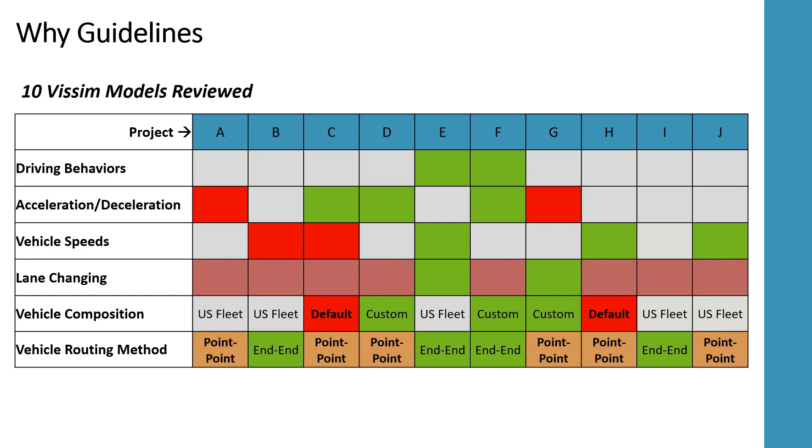All right, so the next slide: this project focused on Vissim, but it also looked at TransModeler. We reviewed 5 TransModeler models as well. Most of them were left with the defaults for a lot of the key behavior parameters that we've been looking at, and we just identified that. So for completeness, we want to share with this group that we did look at TransModeler as well as Vissim, and the guidance document addresses both softwares, which are the 2 that are used here in Kentucky.

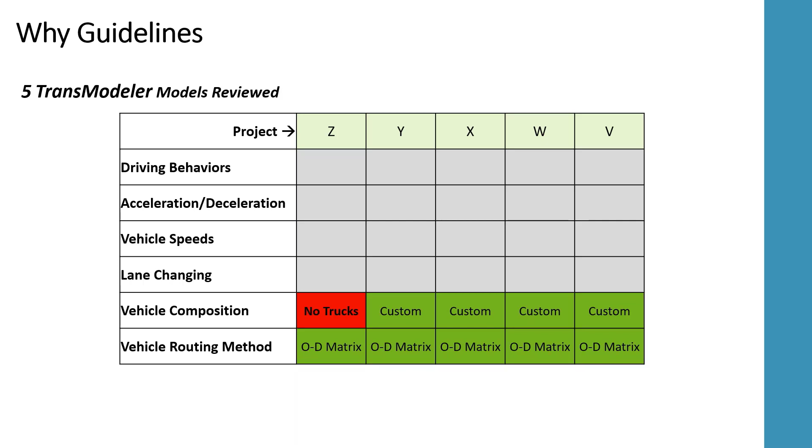So that's where much of the rest of this presentation is going to focus, but the guidance document that we are developing addresses all of these topics and provides folks doing simulation work in Kentucky with that information. It also helps those at the Transportation Cabinet who are scoping projects and deciding how to move forward with projects. So analysis tool selection, for example, is part of this process.

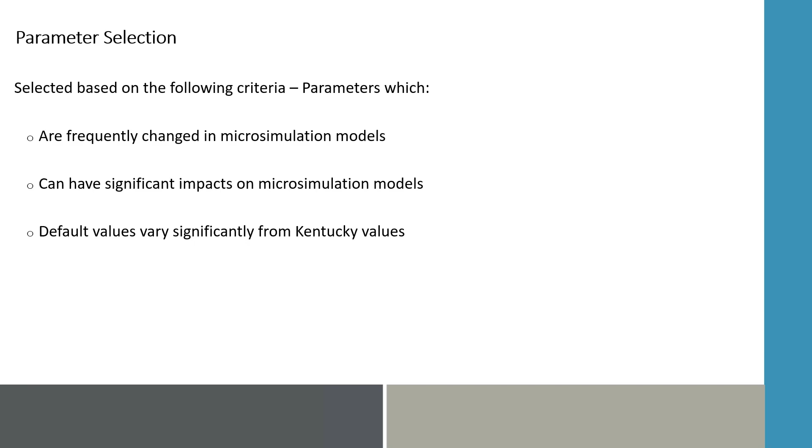So kind of like I was mentioning before, we selected some parameters based on three main criteria. So things that we noticed just from modeling ourselves or reviewing models, or the other guidance documents: parameters that were commonly changed in models, parameters that have significant impacts, and then parameters that we thought the defaults in the software might be significantly different from what Kentucky would be. So those are just kind of and/or criteria. So multiples fall into multiple categories, but that was the general framework for how we selected the parameters.

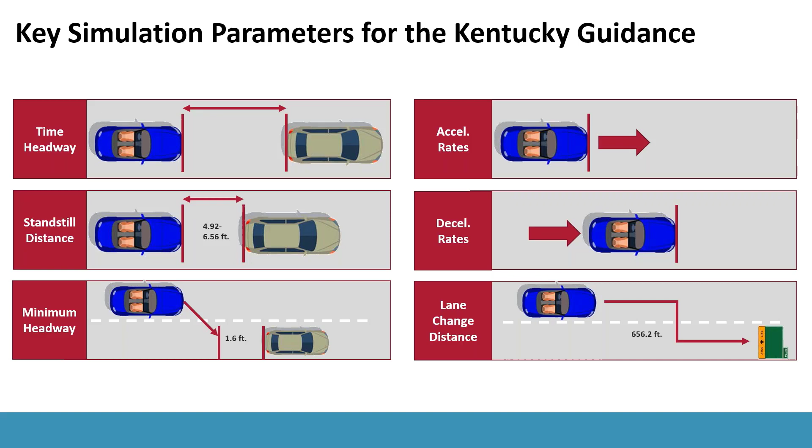And there were 9 that we were really looking at, and of those 9, 6 are really vehicle interaction based, so like actual driving performance and vehicle interaction in the model. So we graphically tried to depict it on the screen here. So time headway, standstill distance, minimum headway, acceleration, deceleration, and then lane change distance. Those are kind of the 6 that you would be able to physically observe, and then the additional 3 to make the full 9

are listed here, but those 3 at the bottom, 7, 8, and 9, are the vehicle speed ranges, so kind of speed decisions, and vehicle fleet composition, and then truck weight to power ratio. Those 3 are more background or fleet associated stuff that you don't really observe between vehicles in the model, but certainly affect the overall outcome of a model. So that's a full list there on the screen.

Many of you are probably familiar with these attributes, how they might affect a model. Maybe you've changed them, maybe you've observed them being changed. So they're commonly referenced in other guidance documents, and people provide values or ranges that they would suggest you use. And for this project, we wanted to make sure that it was, I guess, as local and real world as we could. So our real goal was to use real local Kentucky data to generate or validate the existing values or ranges for each of these parameters.

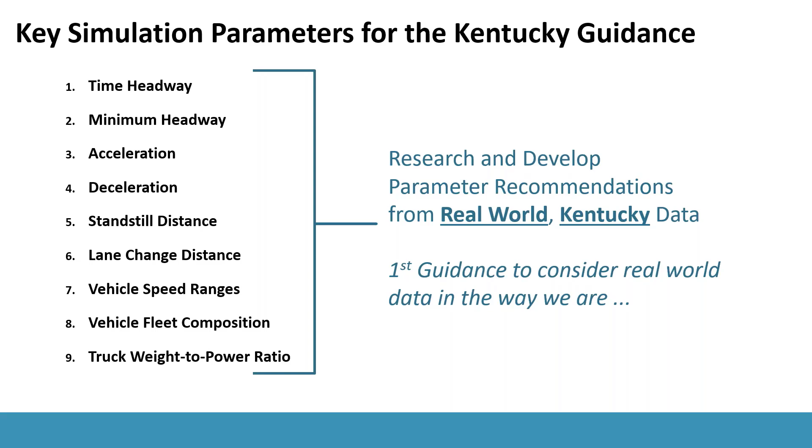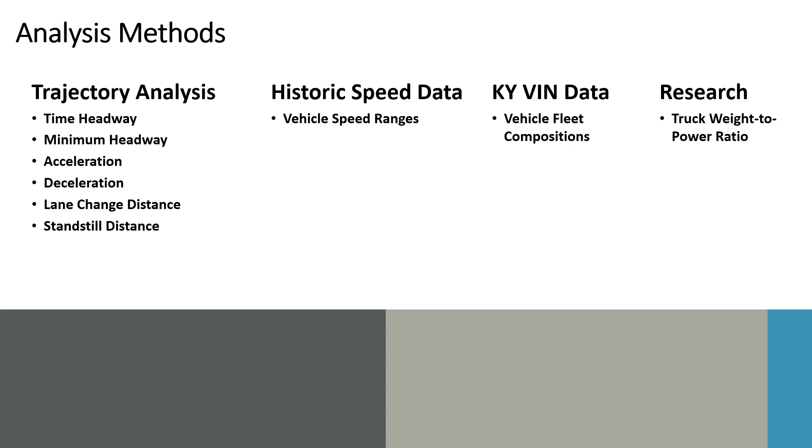So to do that, we were going about it with a few different analysis methods. The main one and the focus for a lot of this topic is the trajectory analysis. So you can see there, we were able to look at those main 6 using trajectory data, and then the remaining 3, we used different data sets for each: historic speed data provided by KYTC, historic HERE data on a variety of different roadways, VIN data, so vehicle registration data throughout the state, and then just literature research on studies about weight to power ratios. This one was the least Kentucky specific, but trucks are not different in Kentucky. So we thought that was more across the board normal.

So to do the trajectory analysis, this was new for me and seemingly new in general. We collected data using drones. So we collected video footage with drones in 8 different locations, both urban and rural, and on arterials and freeways throughout the state. So we tried to get a good mix of different types of driving. Not sure how familiar everyone is with Kentucky, but it has a variety of different environments. It has generally rolling terrain, it's a very traffic engineer thing to say, but urban and rural and suburban sections throughout the state.

And so we wanted to try to get a good mix to get a better handle on what's actually going on. And we did try to provide urban and rural recommendations where they make sense. But I guess the other piece to that is, to me, it was a question of what does trajectory data mean and how do you collect it and what do you do with it?

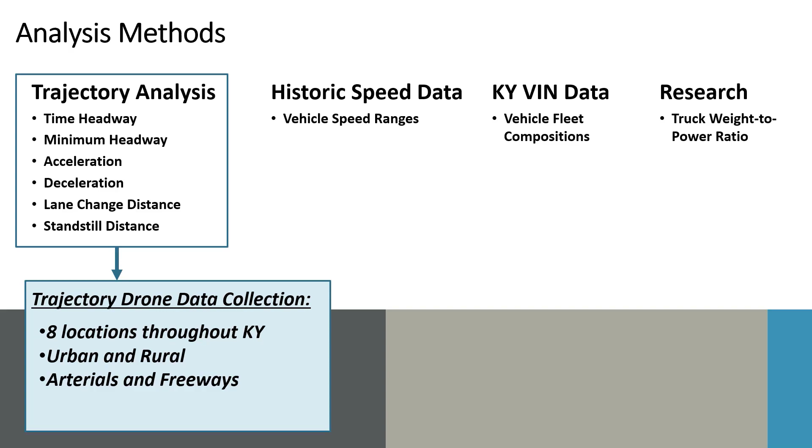That's kind of a next step beyond just collecting traffic counts or vehicle speeds. We really are looking for the interaction between vehicles in a network. So what is vehicle A's speed related to vehicle B, and what is the distance between them? How is someone lane changing as it relates to the other? So that was kind of the newest part of this analysis.

And again, like I said, we collected data in 8 different locations, and this was a little bit of the process that we used to analyze that. So we had a sub-consultant collect drone data at intersections, on freeway locations, and on arterials, just hovering above a scene like you're seeing here, and then using another software vendor, analytics company, we were able to upload the videos into their system, and they're able to track vehicles in the video frame as they move through.

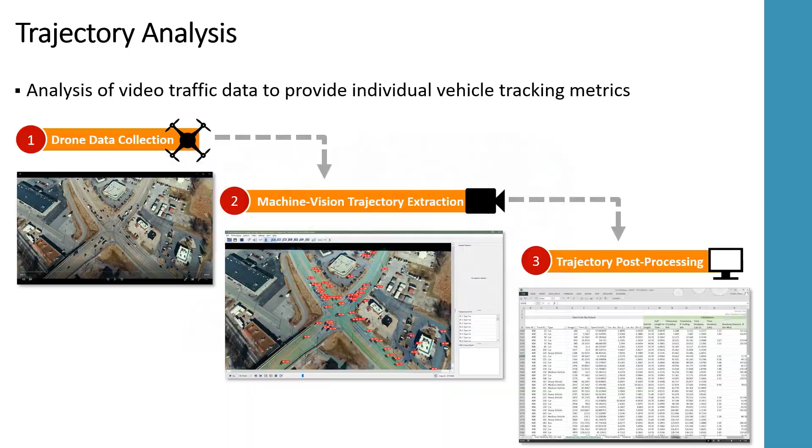So you can see in that still, and I have some videos here in a second that show exactly what they're able to track. And then from there, we were able to export all that raw trajectory data that is registered to each separate vehicle and time stamped and location stamped, and do some post-processing just using analysis tools like Excel to try to determine what is actually going on the roadway as it relates to those parameters we were talking about. So the company we used was DataFromSky.

So hopefully this is loading on your screen, but there should be just a little video playing. And DataFromSky, there are a couple companies that do this. This is a European-based company, but we had researched and talked to a few different vendors for this, and they seemed like they had a platform that worked best for what we were trying to do at the time. But there might be additional ones out there at this point. We started this maybe a year ago or so.

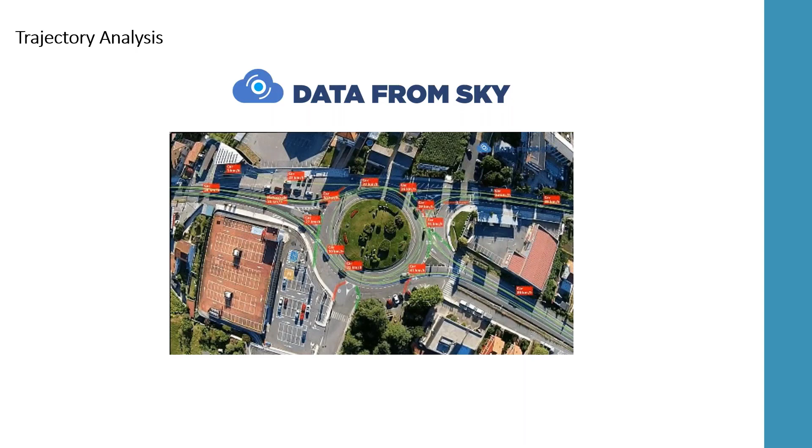So as you can see just in this video, it's tracking all these cars as they move through this roundabout. And here is, again, that intersection that I showed before, just a clip. And you can see here, it's IDing cars as they enter the frame, and then giving each one an ID, and then tracking them as they move through. So I'm going to show 3 videos, each of them showing a different attribute to what this data can do.

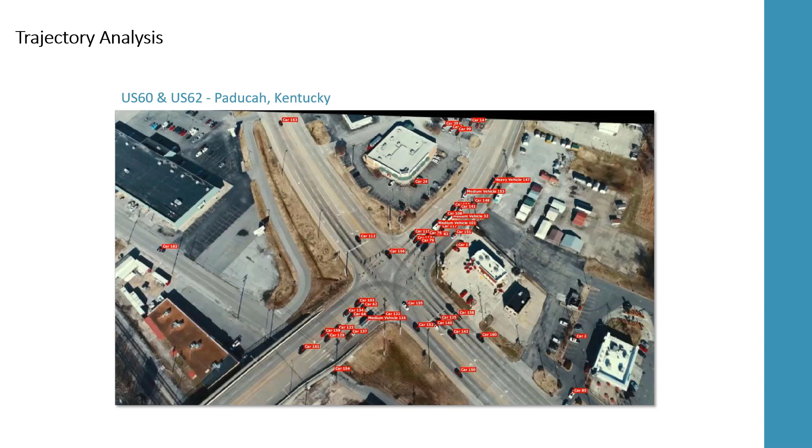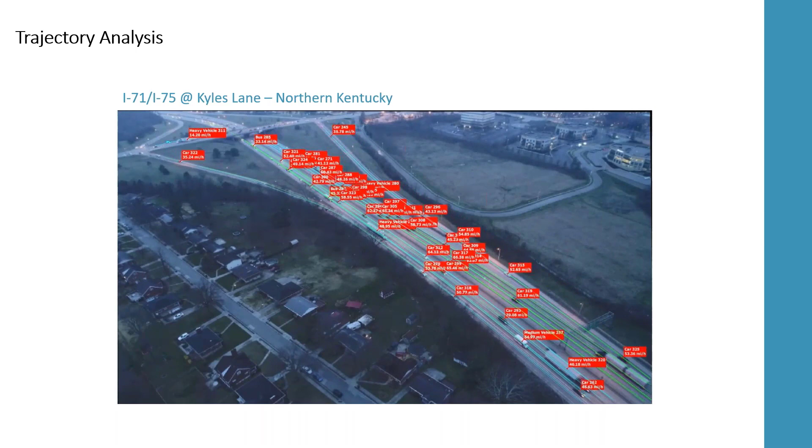But it has the ability to also be geolocated. So at first it's just showing you in pixels, but this jumps into translating it to miles per hour or feet per second. But these 3 videos are from different areas of the state. So this is in Paducah, Western Kentucky. This is in Northern Kentucky on a freeway segment there. So you can see it's catching all these vehicles as they enter, tracking them through, and showing their speeds as they change. And then similarly, this is another video in Louisville, Kentucky. So another urbanized area. And this is showing acceleration, deceleration changes, which are very rapidly changing.

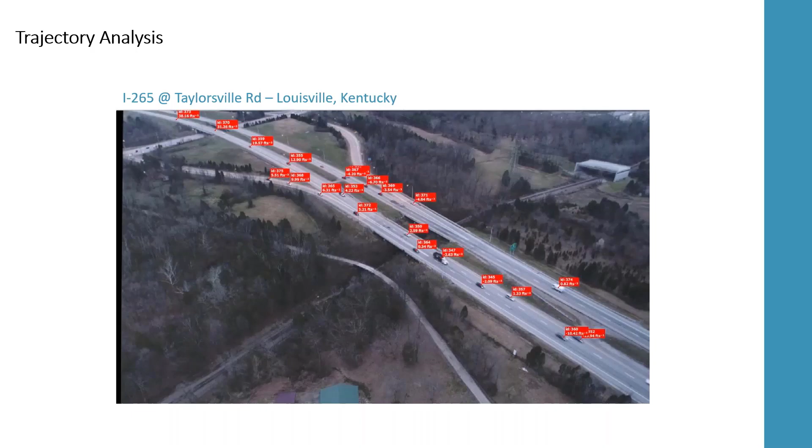So that was kind of the backbone for a lot of this trajectory analysis. And that was the first time we had done that kind of work, and it became achievable at a consumer level. So it really could be done on any project at this stage. Obviously, you wouldn't want to do all this stuff that we're doing for this project, but just in general, it was surprising how easy of a commodity that was.

So we used that data, like I was saying, to come up with some initial findings and recommendations for the 9 different parameters. So I'll run through those parameters in general, showing mostly graphs on the left, and then just some general data analysis pieces on the right, and I'll just talk to each one of them. So looking at the time headway, I guess just really quick before I go through all that, I want to mention that this was both for, like we said, Vissim and TransModeler.

So I'm mostly trying to focus on Vissim here, but you might see some Transmodeler data on some of these tables or graphs, just because that was the focus of our project, to accommodate both softwares, to be a bit agnostic toward software selection in terms of microsimulation, and try to make them comparable. So make them both a little apples to apples. If someone chooses Vissim or someone chooses Transmodeler for the same type of project, we want the results to be something that is kind of cohesive.

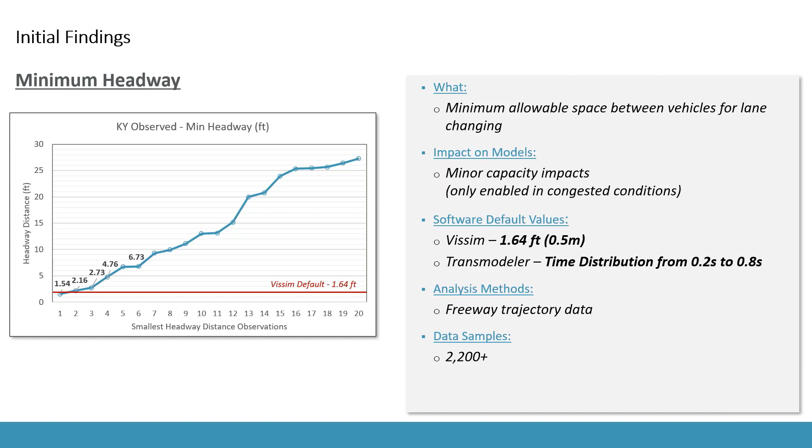And in our data, some of the low end observations were in that 1 to 2 to 4 feet range. So while it's not happening all the time, and while we had a decent sample set, we didn't really see a reason to change from the default recommendation. That actually goes right in line for Transmodeler as well. There's a time-based, but similar kind of thing. Their distribution was pretty close to what our distribution was. So it's the same information here, more of a validation of the default values rather than a recommendation for change.

So the next two would be acceleration and deceleration. And there are a lot of ways you can modify this in the software. We weren't really targeting to modify the default values, so what the vehicles can or cannot do, but we were more looking to modify it in terms of the driving behavior values. So these values of CC8 and CC9, so standstill and acceleration from 50 miles per hour.

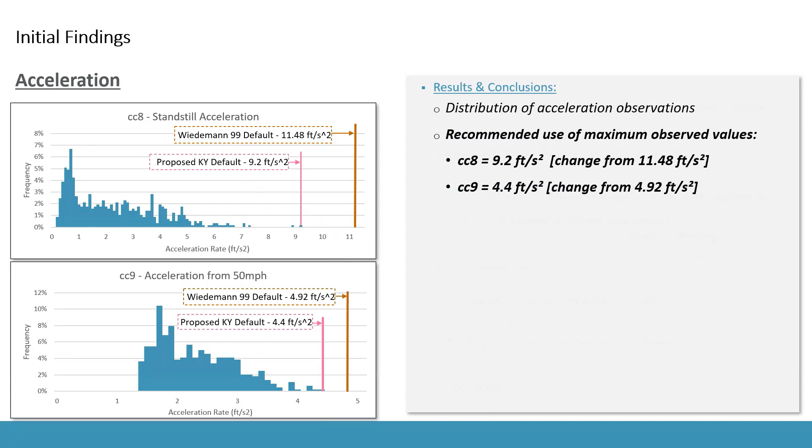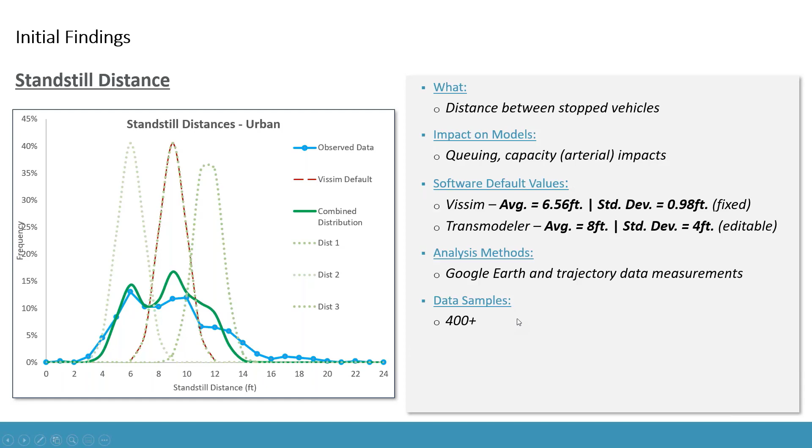So that's really standstill distance. Lane change distance, this one was probably the most difficult to use the trajectory data for, just because you want to observe when people are changing lanes to make a turn or take an exit. But the trajectory drone data, even just based on FAA regulations and waivers that we could get, we could only fly the drone so high to also get resolution that would work.

And so we have a few extra flights that were looking down a corridor or along a roadway, and those actually were extremely useful for this kind of thing, just anecdotally observing, okay, this vehicle made the exit, or this vehicle turned left, but where did it start, and what lane was it in when it came into frame, or how far back was that, and knowing just in Google Earth you could measure.

We pretty much observed that nobody was really changing lanes within, let's say, 1,000 feet or so, and most people were well in their lane further back than that. So people were starting to change lanes maybe in that 1,000 to 2,000 foot range, but a lot of people were in the lane they wanted to be in well in advance of that. This is mostly on freeway segments, but that's where it seems to be most critical anyway.

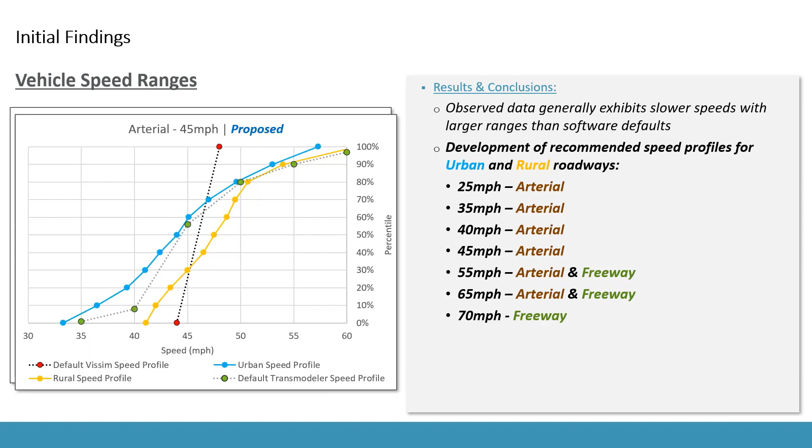I think on the next slide I showed this, but we developed speed ranges for urban and rural roadways. So urban and rural speed ranges for different posted speed limits, and then for different roadway types. So we got enough data to be able to recommend those, and those are the most common speeds that we're modeling or that we have throughout the state. Just jump back here to the freeway segment really quick.

But for each one, we wanted to have a multi-point curve, so a distribution of 10 data points, each 10th percentile. And this also helped really hamper down the models. We're slowing the models down for the most part in all cases at all the different speed limits. I don't know if that's just a general attribute of the way that people drive. Again, Kentucky drivers on a 70-mile-an-hour roadway are not going that far above 70.

Or if, so it's hard to say if that's just a local observation or not, but it seems to be similar across the board. You can see on these freeway segments, we're kind of hampering it down from both Vissim and TransModeler, but on these arterial segments, we're actually expanding it a bit more to provide more variety and variability in travel

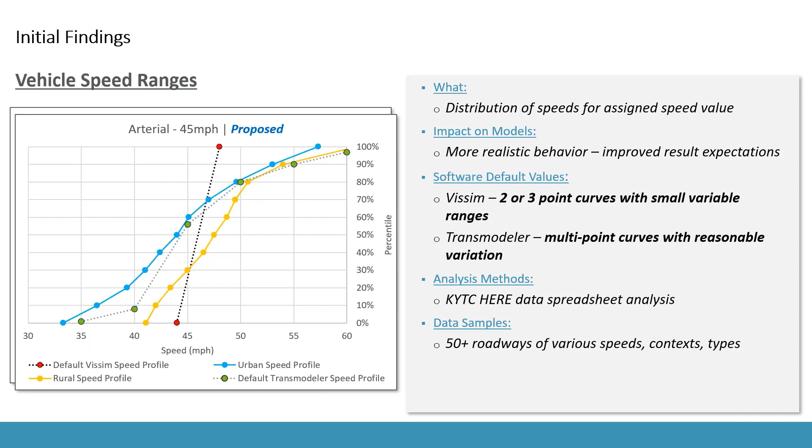speeds. So instead of vehicles just trying to go between like the 44 and 48, we're actually showing vehicles that are going in the 30s up into around 60 or so. Yeah, this just added another level of variability and control to the models to kind of better distribute the traffic.

Vehicle fleet composition, at least again for us and for me reviewing models, is something I observe often that is unchanged. It'll just be either the default or the Vissim US fleet default, which actually matches the Kentucky data pretty closely, or just a very simplified vehicle mix. Someone adds a few 2D or 3D models, and then 1 or 2 cars, 1 or 2 trucks, and then creates a custom mix from that. That's not really representative of what's going on.

So we wanted to capture that by taking what vehicles are actually in the state. So using the VIN database, we were able to kind of see that. And the one issue here is that you can see that the trucks are tractor trailers and single unit trucks. So the orange here are not as represented in the Kentucky average. Trucks are usually traversing through.

And so we created this graph, but really we ended up creating a little interactive spreadsheet tool that, if you collected data on a route or in an area, you could program in, okay, I have 93% passenger vehicles and 7% trucks, and it would auto update with what the percentile breakdown should be to best match the Kentucky data, considering all the VIN registration data for passenger cars.

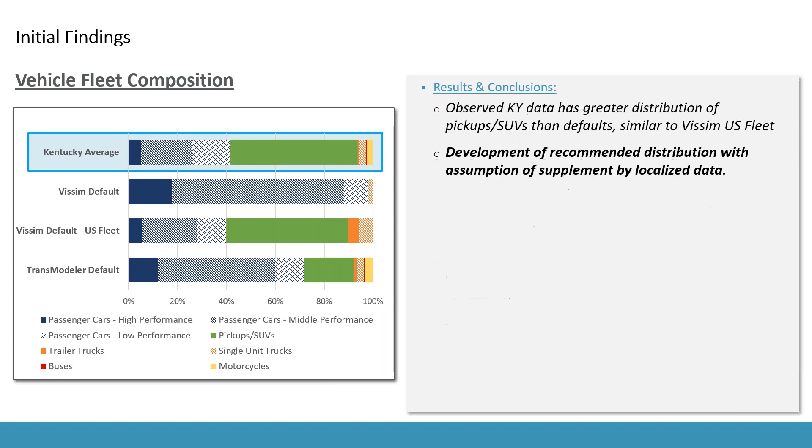And then the last one is the truck weight to power ratio. This one was the least local, but we wanted to look at this in terms of how it affects the models with regard to truck accelerations and decelerations. That's really the biggest piece to that. So just noticing that sometimes trucks will beat a passenger car from a standstill in Vissim. And at least from our experience, it's not always the most realistic thing. I mean, an unloaded truck has a lot of power, but a loaded down truck certainly doesn't.

And so based on our knowledge, Vissim is by default applying the distributions of weight and power randomly based on a range of values, which creates higher ends and lower ends. So these two spikes here, that's really due to the caps on the upper and lower limits. Those caps then get extrapolated out, multiplied against each other.

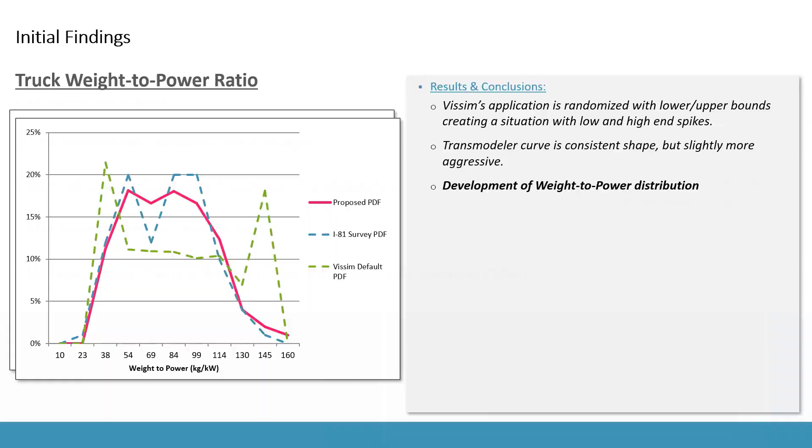So that was probably a ton of information. Hopefully that makes sense to people that are modeling or have modeled, and provides kind of an overview of maybe a different way to look at how to get parameter values or get parameter ranges using a different set of data, or kind of going pretty in depth.

That was an aspect of the project that we were really interested in making sure that we researched thoroughly and got right. A lot of what we're recommending is, as you saw, close to the defaults in a lot of ways. It's also similar to what a lot of other states are recommending. It's just good to know that that's validated in some ways by data observations. So it is close to real world conditions as far as we can tell.

But to wrap things up, I just want to hit on the deliverables for our project. So all this work was done to create a guidance document for modelers and for reviewers and just users of microsimulation throughout Kentucky. So that's the main deliverable, the finished guidance document, currently under final review, and hopefully will be completed in the next month or so. That would contain all of our recommended parameter values and ranges.